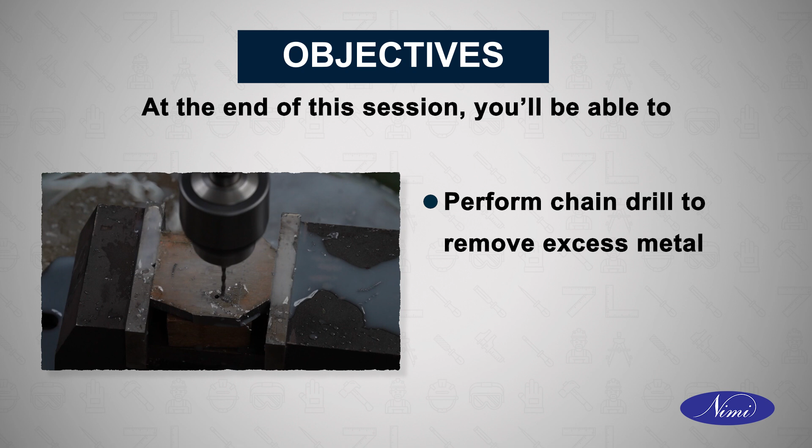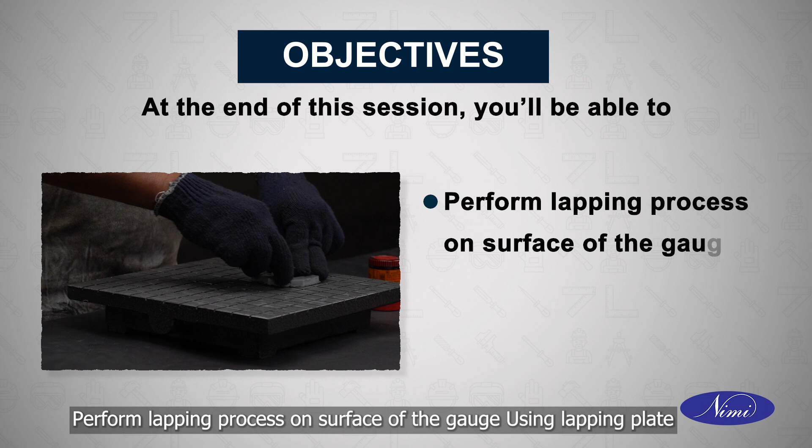Let us look at the objectives of this session. At the end of this session, you will be able to mark the profile as per drawing, perform chain drill to remove excess metal, file go end and no go end to size, check the gap go end and no go end with slip gauge, perform lapping process on surface of the gauge using lapping plate.

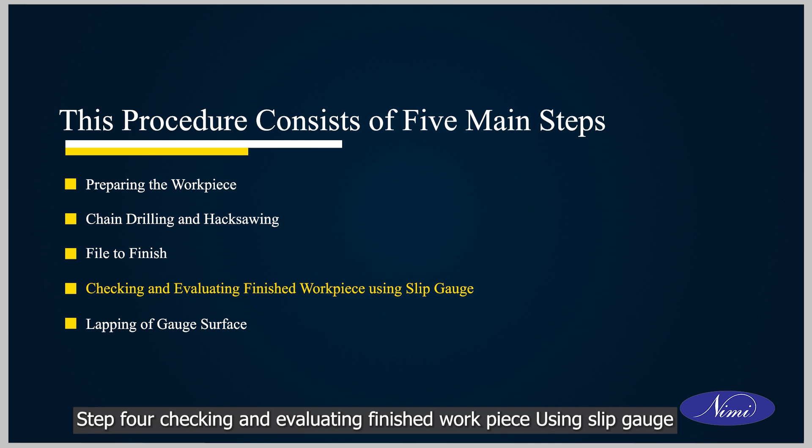This procedure consists of 5 main steps. Step 1. Preparing the workpiece. Step 2. Chain drilling and hacksawing. Step 3. File to finish. Step 4. Checking and evaluating finished workpiece using slip gauge. Step 5. Lapping of gauge surface.

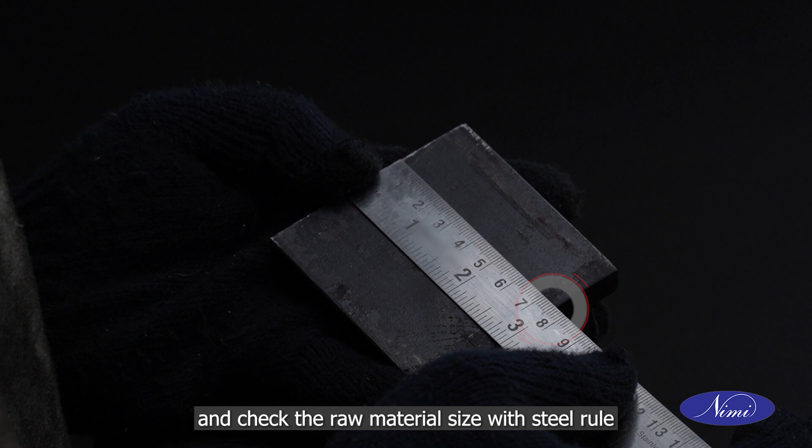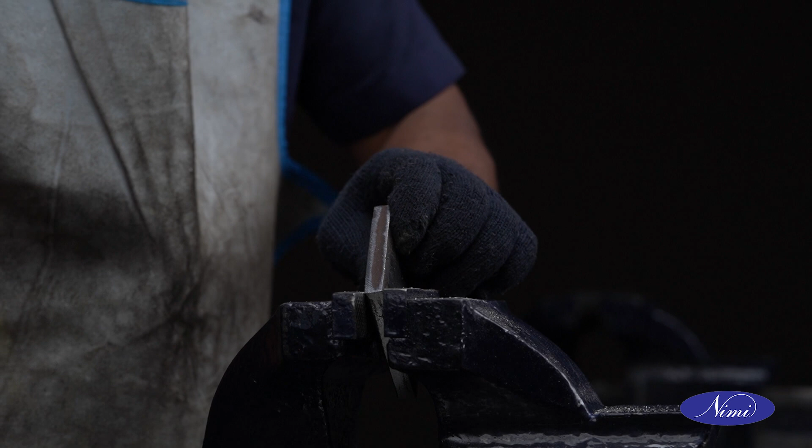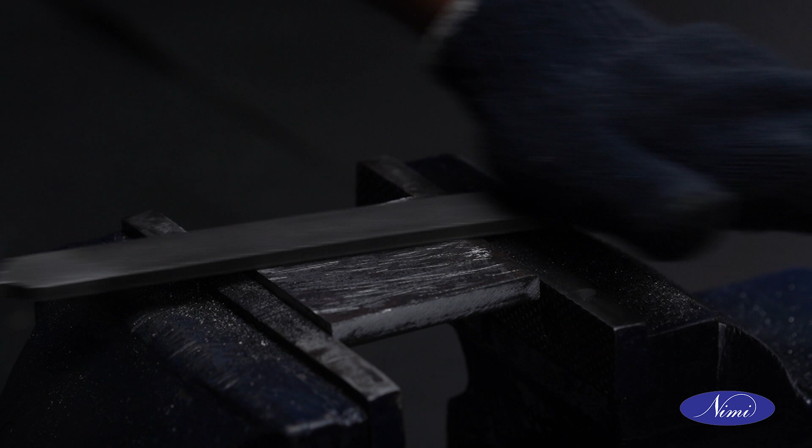Let us first prepare the workpiece and check the raw material size with steel rule. File all the 6 faces using a bastard file. Ensure parallelism and perpendicularity using a tri-square.

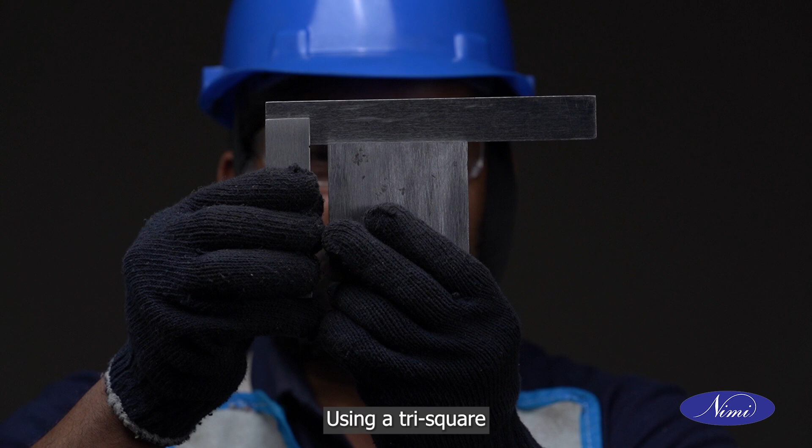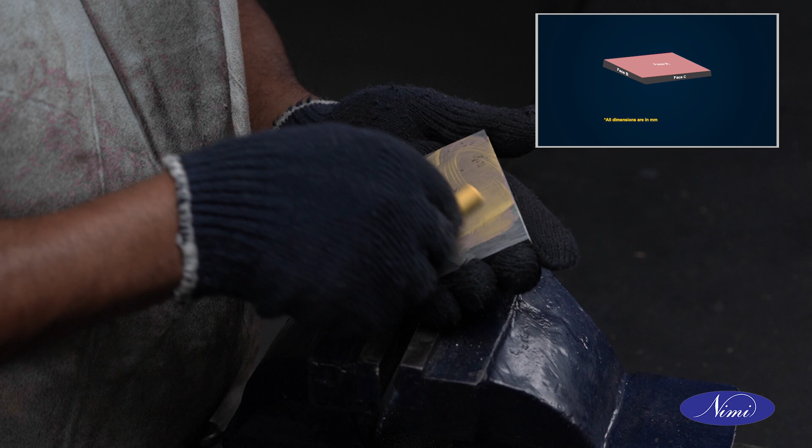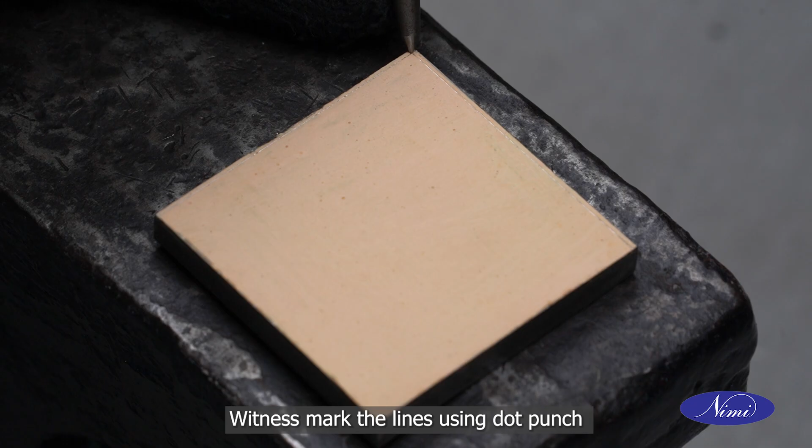Apply marking media on face A. Mark to size as per the drawing using vernier height gauge. Witness mark the lines using dot punch and ball peen hammer.

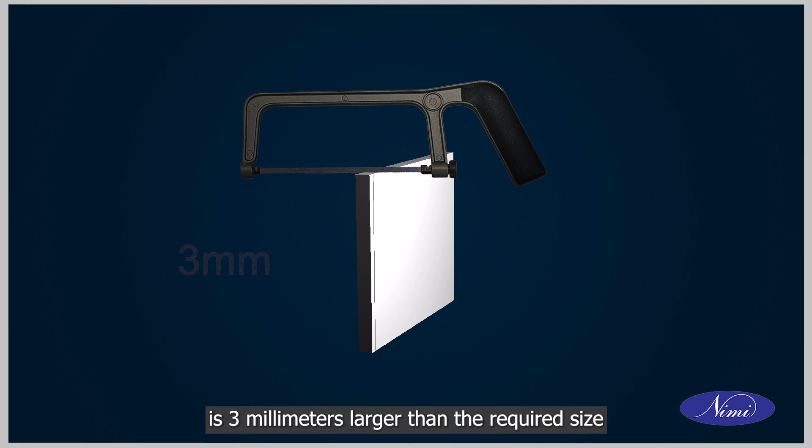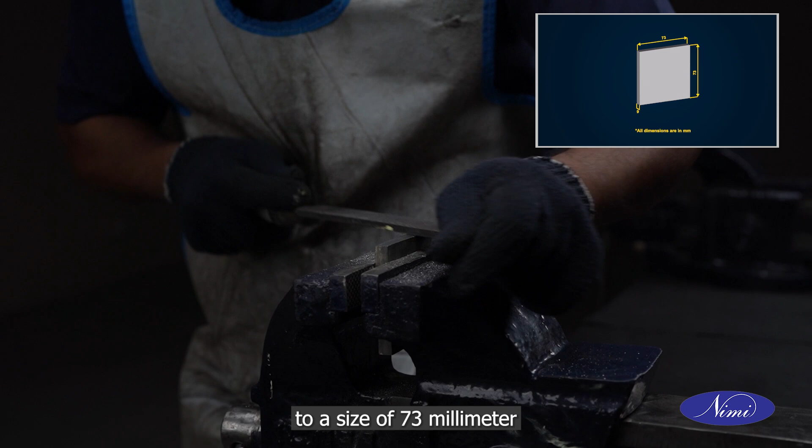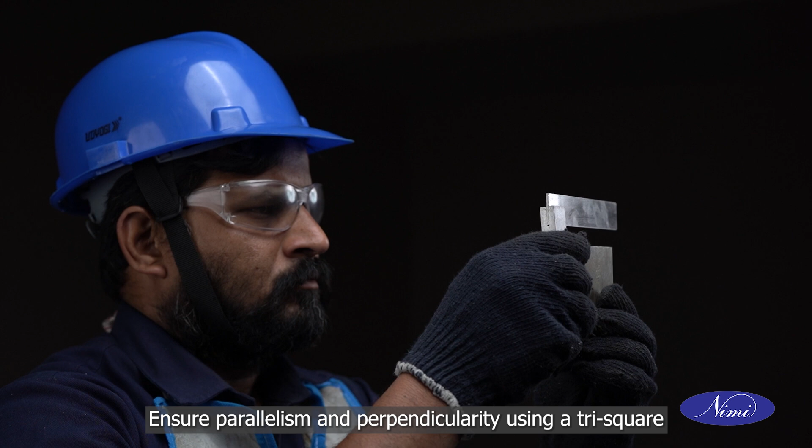Hacksaw the excess material if the available raw material is 3 mm larger than the required size. Rough file using bastard file and finish using smooth file to a size of 73 mm by 73 mm by 9 mm. Ensure parallelism and perpendicularity using a tri-square. Check the size with vernier caliper.

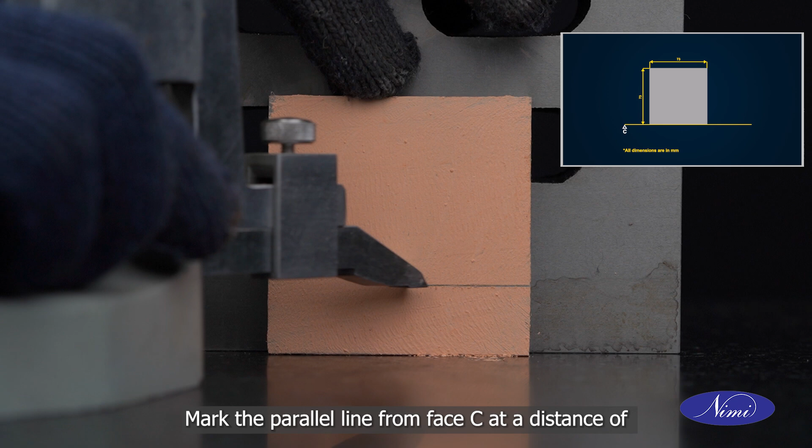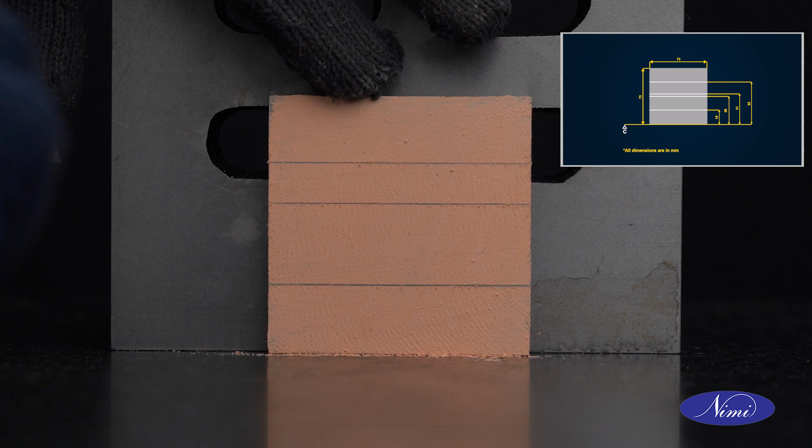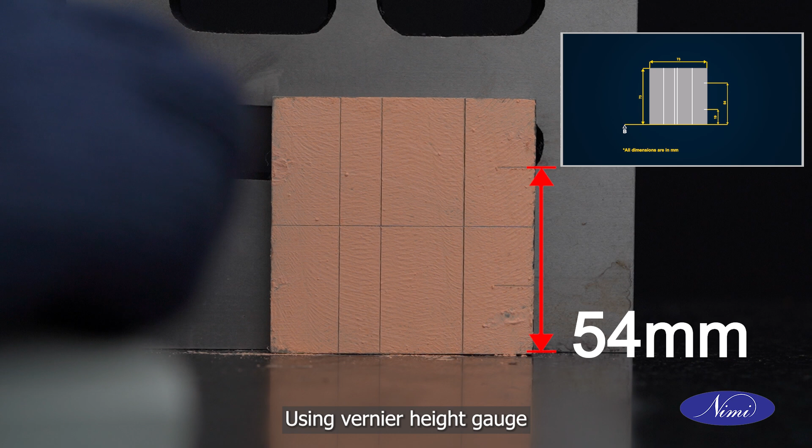Apply marking media on face A. Mark the parallel line from face C at a distance of 19 mm, 41 mm and 53 mm as per the drawing using vernier height gauge. Mark points from face B to a distance of 19 mm and 54 mm near the end of face C using vernier height gauge. Mark the parallel line from face B of the specimen at 36.5 mm using vernier height gauge.

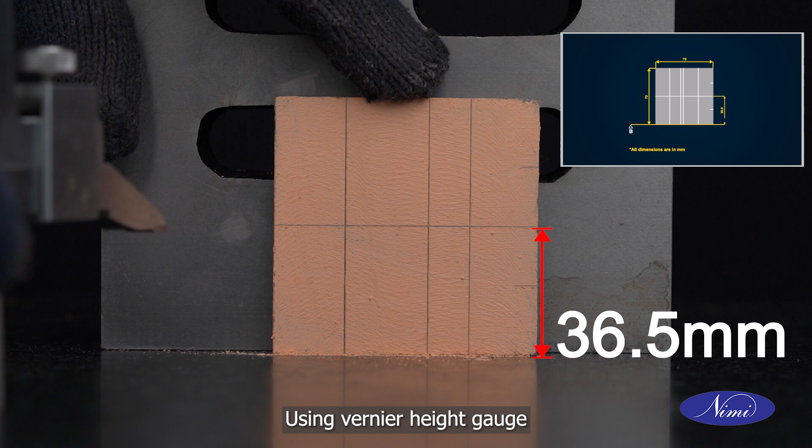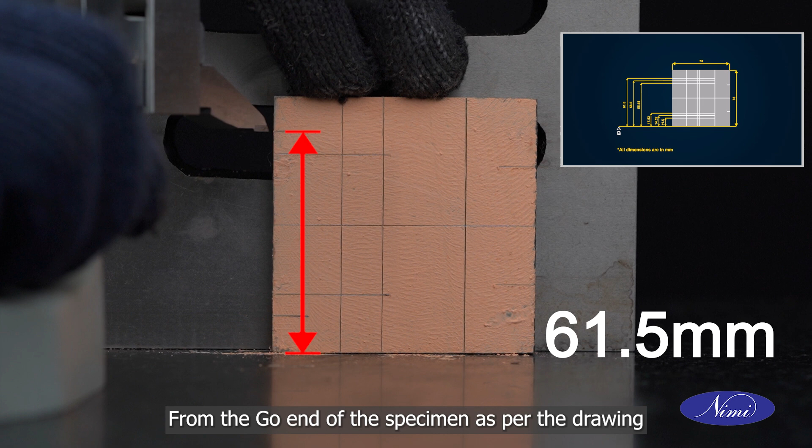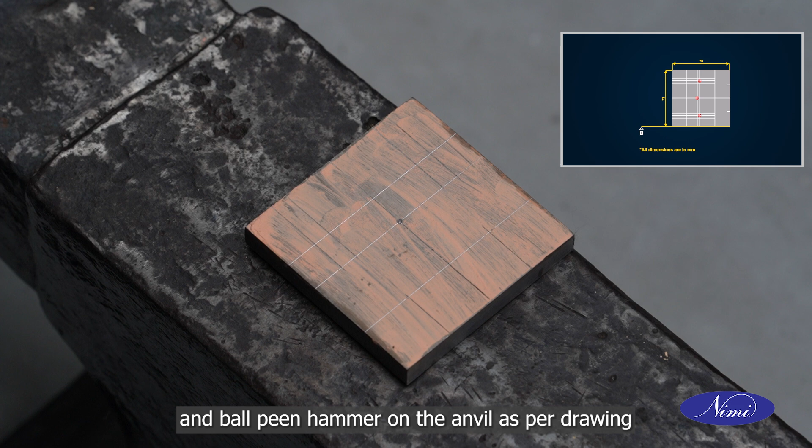Mark parallel lines from face B at 11.5 mm, 17.52 mm, 55.48 mm and 61.5 mm from the go end of the specimen as per the drawing. Witness mark the arc centers using center punch and ball peen hammer on the anvil as per drawing. Draw the arcs using steel rule and divider on the surface table as per drawing.

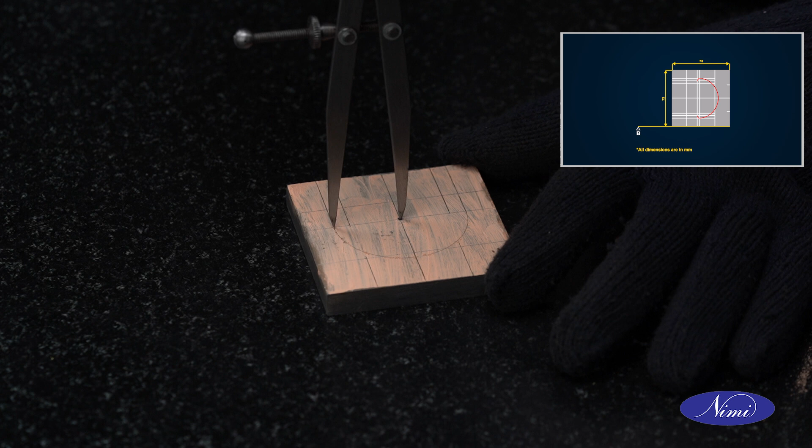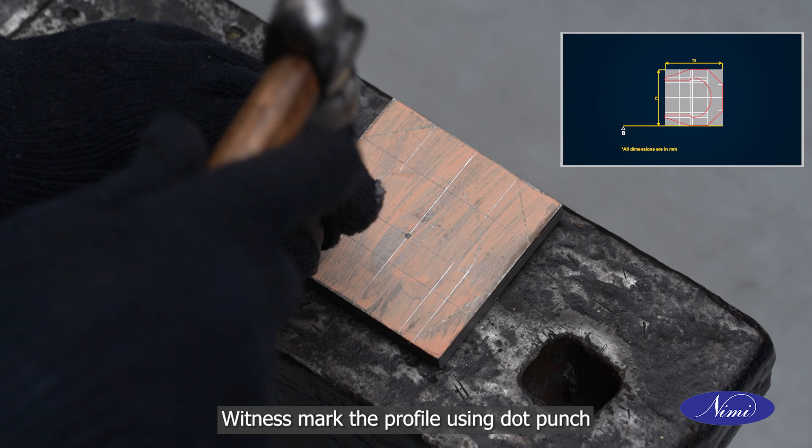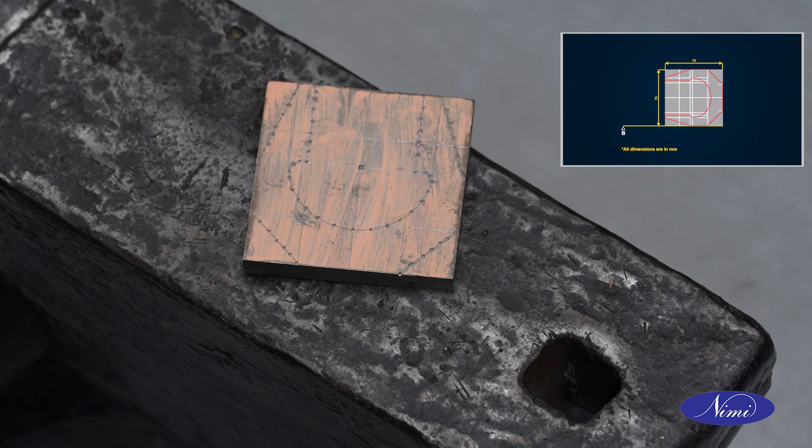Draw the profile lines using a scriber and steel rule on the surface table as per drawing. Witness mark the profile using dot punch and ball peen hammer on anvil as per drawing. Hacksaw to remove the excess material as shown in the drawing.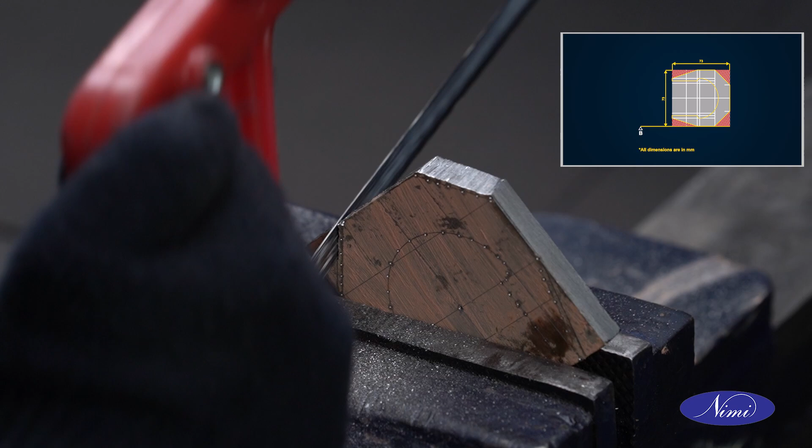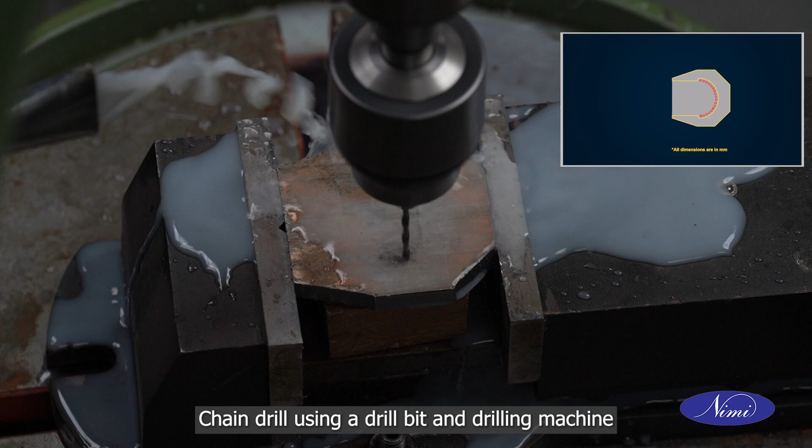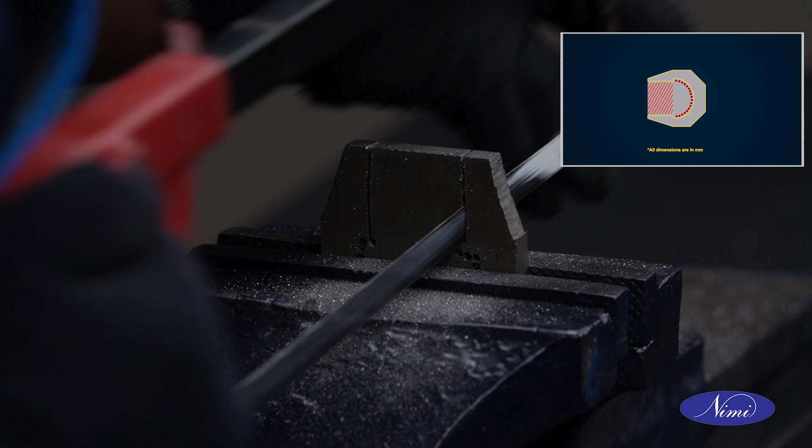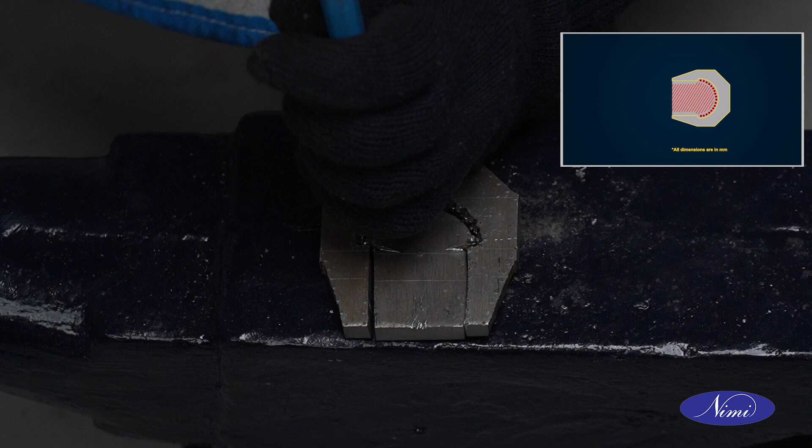Chain drill using a drill bit and drilling machine to remove excess metal. Hacksaw from the go end as per the drawing using hacksaw blade with frame. Chip and remove the excess metal using small flat chisel and sledgehammer. Rough file the profile using bastard file.

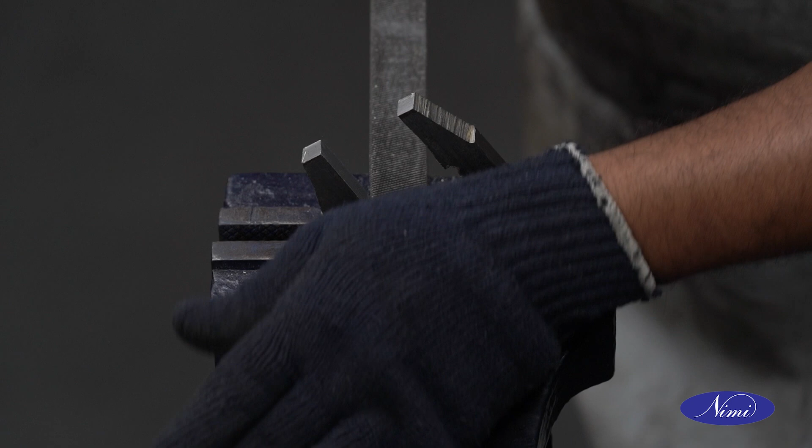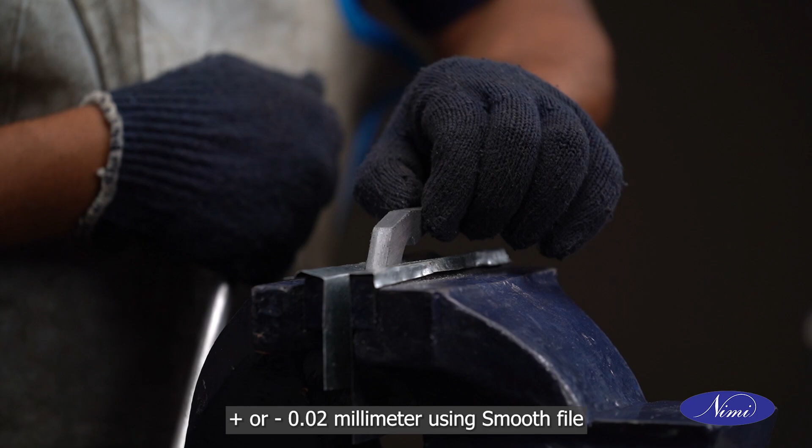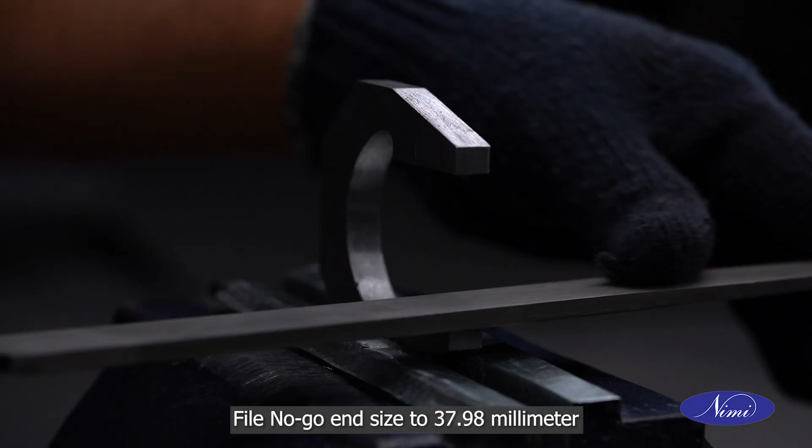File and finish the profile to size and shape, maintaining accuracy of plus or minus 0.02 mm using smooth file. File go end size to 38 mm maximum limit of size. File no go end size to 37.98 mm minimum limit of size.

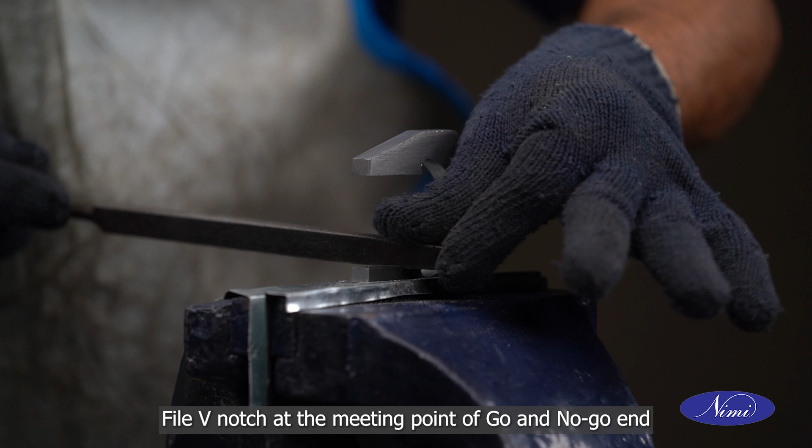File V-notch at the meeting point of go and no-go end using a triangular file. Finish the surface and remove the burrs on the corners of the job.

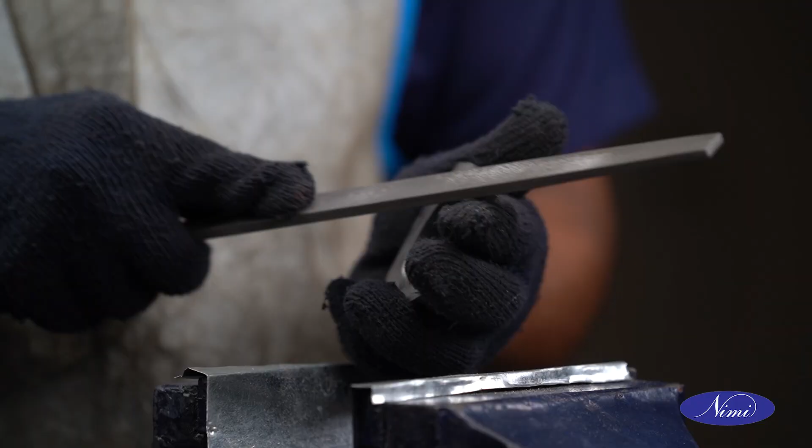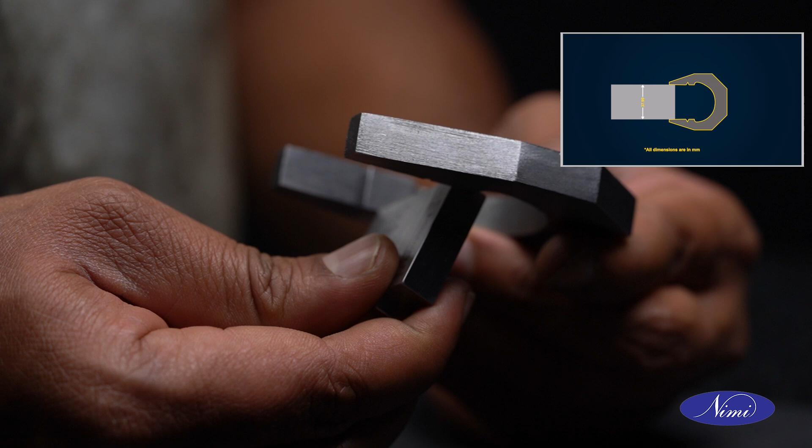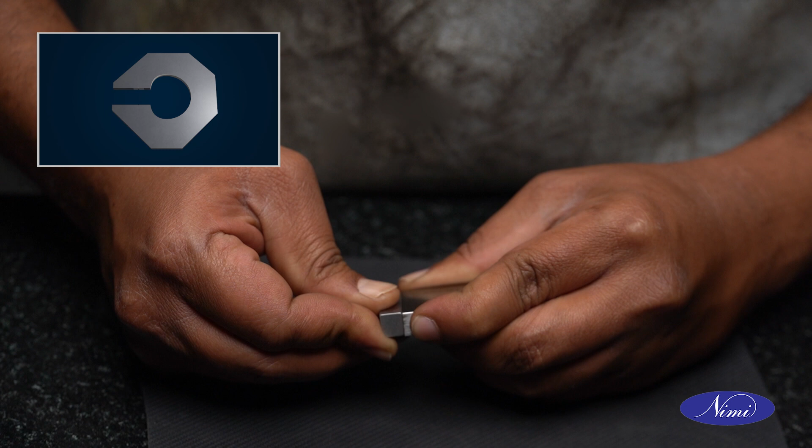Let us now learn the procedure to prepare the slip gauge for the dimension of go end and no-go end. Check go end and no-go end using slip gauge as per the drawing. Stack the slip gauge to a dimension of 38 mm. It should go inside the go end and should not enter the no-go end of dimension 37.98 mm.

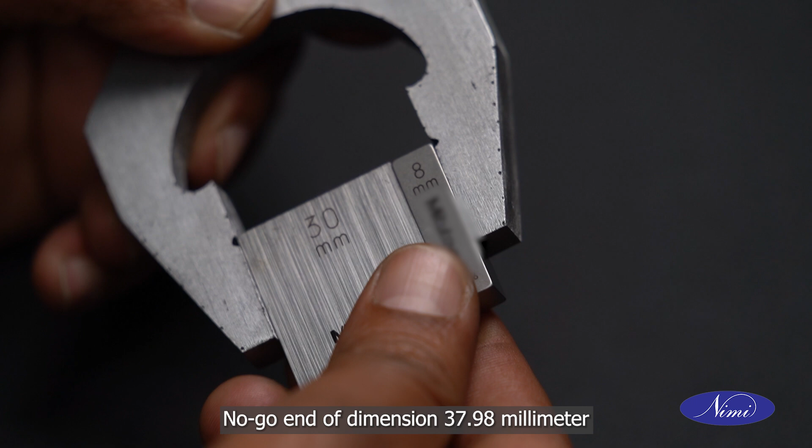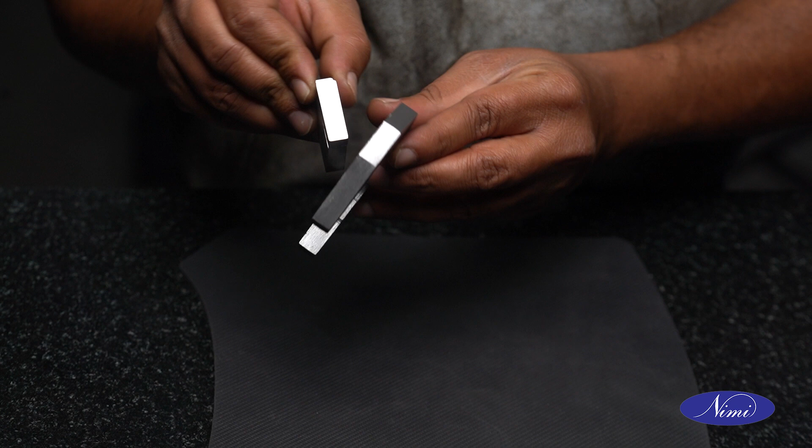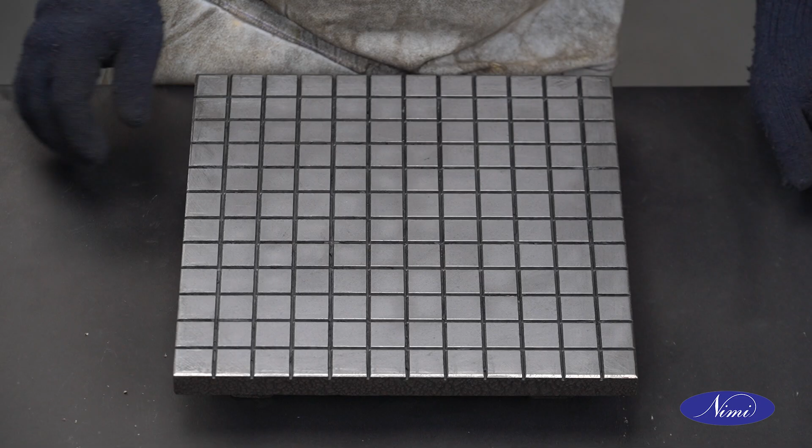Now, let us learn about the lapping of the surface of the gauge prepared. Select a lapping plate made of cast iron. Place the lapping plate on a firm surface. Charge the lapping compound consisting of aluminum oxide abrasive on the lapping plate.

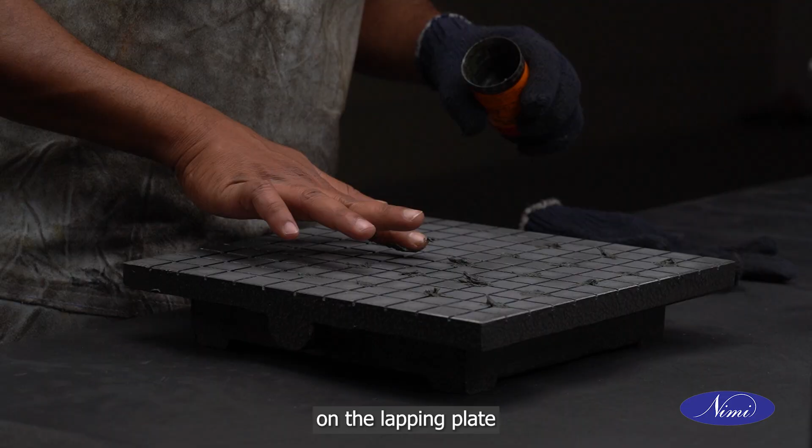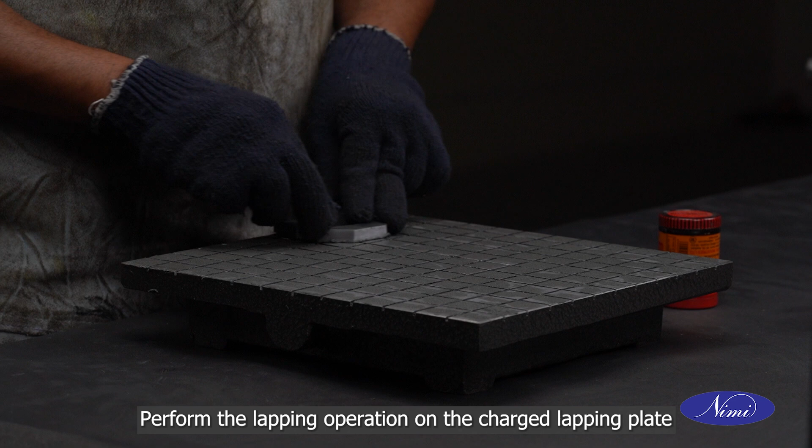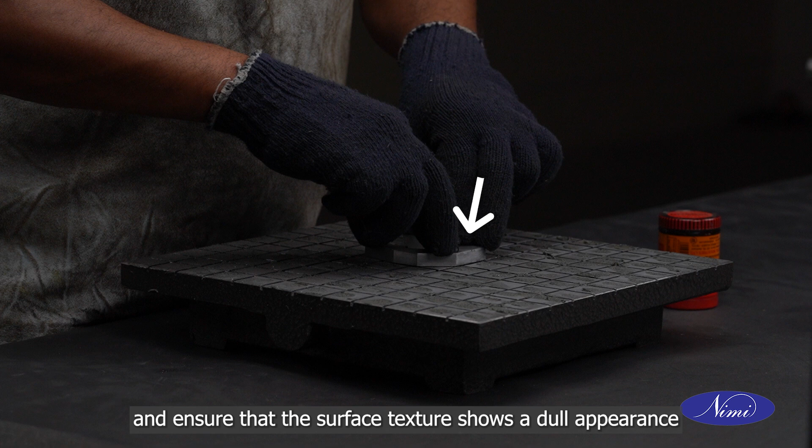Place the prepared gauge on the lapping plate. Perform the lapping operation on the charged lapping plate. Apply light pressure while lapping and ensure that the surface texture shows a dull appearance.

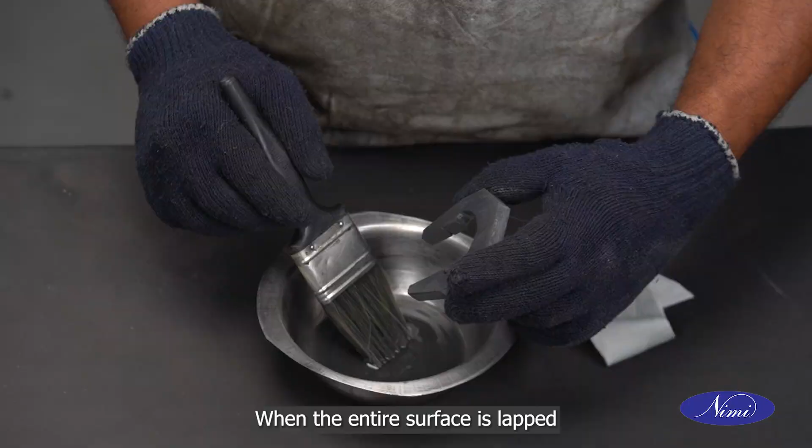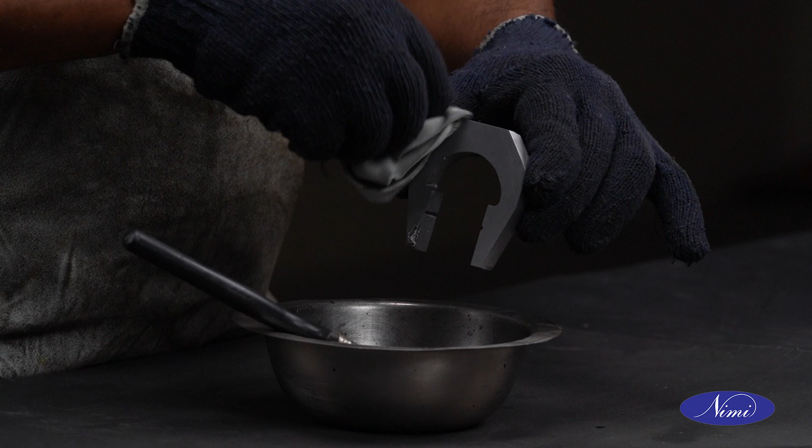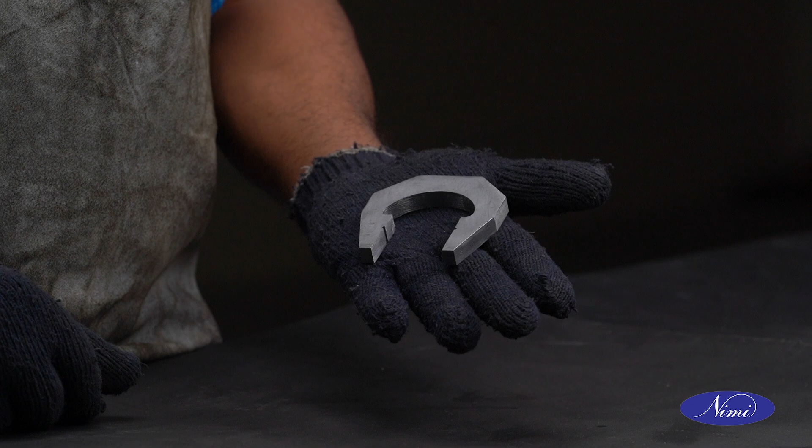Repeat the previous procedure to lap on the other surface of the prepared gauge. When the entire surface is lapped, clean the surface with kerosene and inspect the surface. Apply oil and preserve it for evaluation.

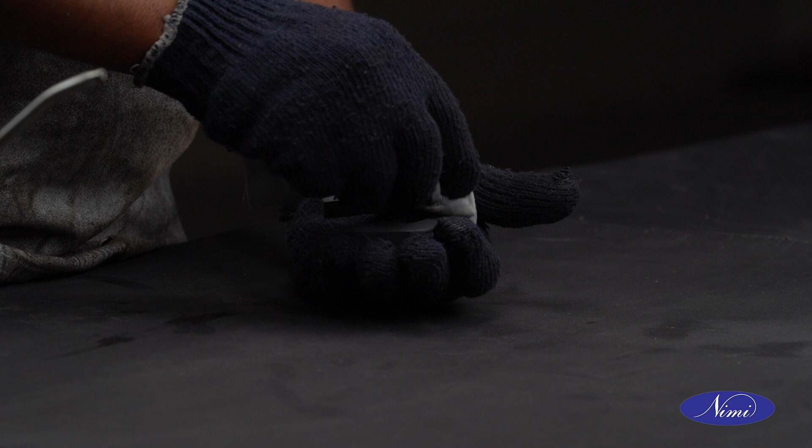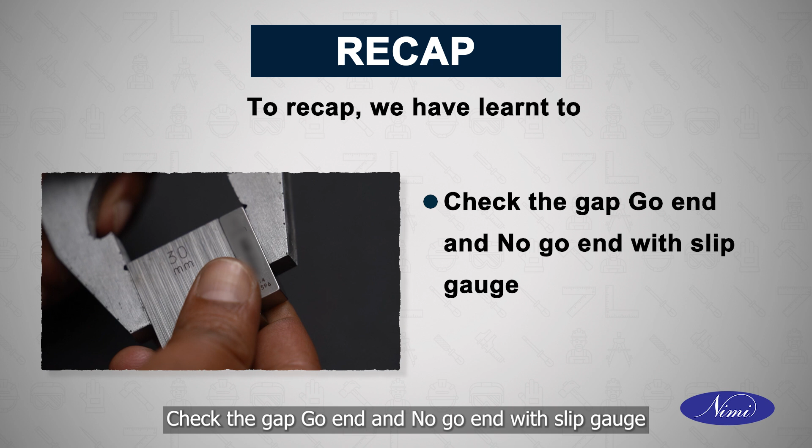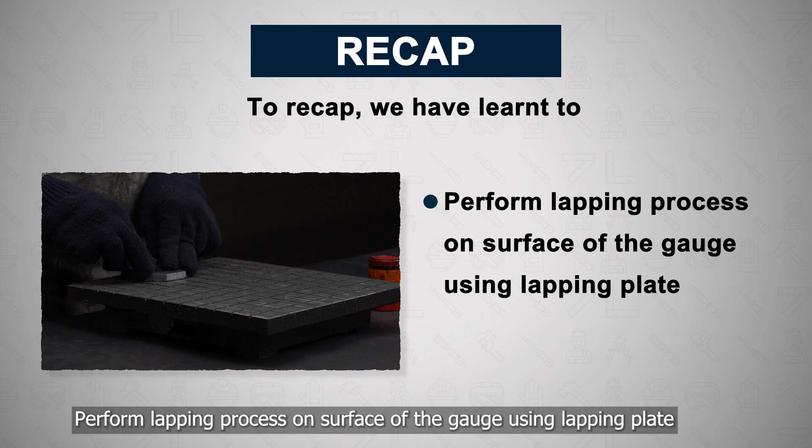To recap, we have learned to mark the profile as per drawing, perform chain drill to remove excess metal, file go end and no go end to size, check the gap go end and no go end with slip gauge, perform lapping process on surface of the gauge using lapping plate. So that's all about simple hand lapping.